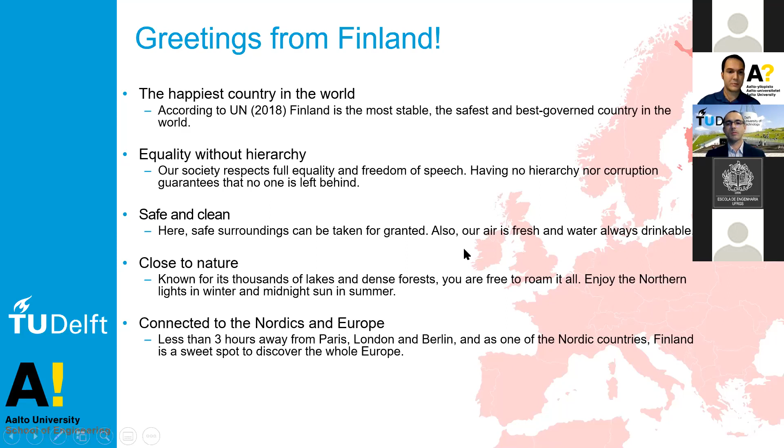Aalto University was founded in 2010, and although it has only 10 years of existence, there is already a strong background behind it, because Aalto University was founded after the merging of 3 other universities from the Helsinki area. But despite being only 10 years old, we are very proud to say that we are the 9th best young university in the world, and also the 50th most international university in the world.

Just some key figures about the School of Engineering. Aalto University has produced so far 3,300 students, with 400 Master of Science degrees, 300 bachelor degrees, and 45 Doctor of Science degrees. We currently have about 70 professors, and we are continuously looking for funding from non-academic partners.

That being said, given this introduction, let me now jump a little bit into some concepts about variable stiffness composites.

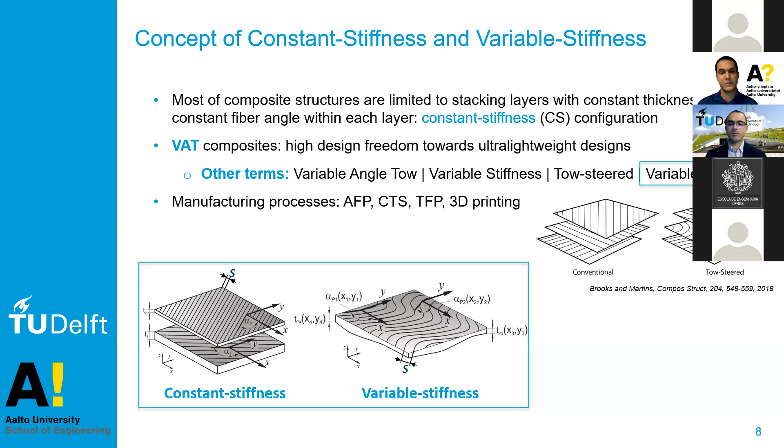Moving further on the manufacturing technologies to produce such laminates, let me say a little bit about the automated fiber placement manufacturing process. It's a well-established process, largely used in most aerospace and aeronautical companies, such as Airbus, Boeing, and also NASA, as we can see in the video being played now.

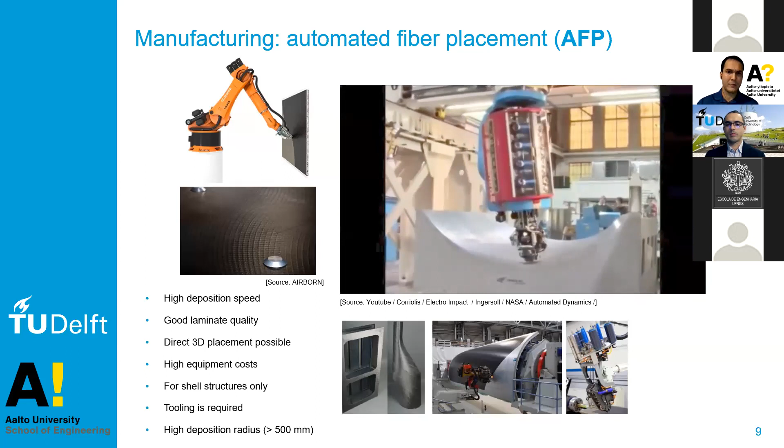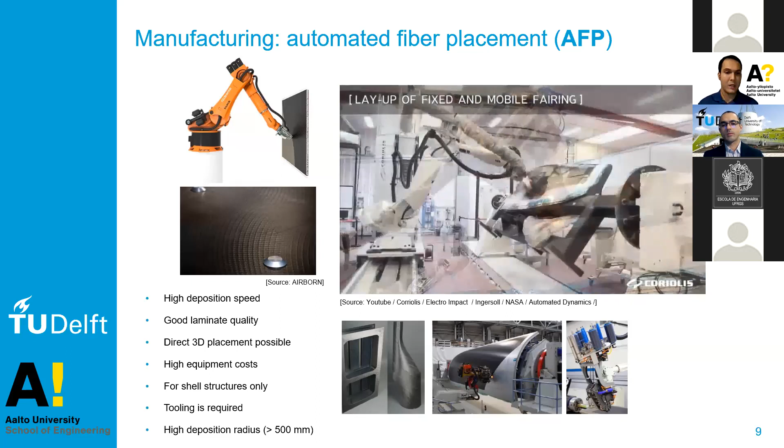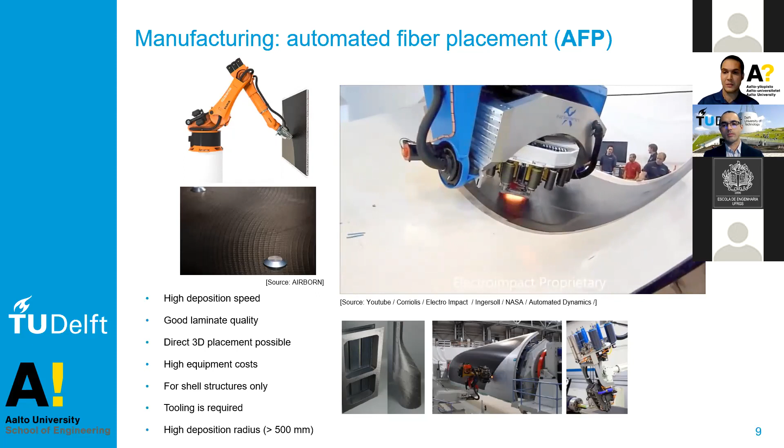However, AFP is, as people in the industry say, well suited for today but not for tomorrow, especially due to some key limitations, the most famous and critical being the high deposition radius, or minimum steering radius - it's the same thing. For example, to produce a nearly defect-free laminate, we have a minimum steering radius of 500 millimeters, which restricts the design freedom of a particular structure.

Here are some attempts that Saullo and I carried out at a startup company at Aalto University, in which we tried to steer fibers with AFP using several minimum steering radii. As we can see here, we could only achieve a defect-free tow path with a minimum steering radius of 700 millimeters, which is quite a lot for aeronautical and aerospace components, and it restricts the design freedom of the laminate considerably.

Based on those limitations, some researchers from the University of Bristol invented in 2012 the continuous tow shearing manufacturing process, in which the main motivation was to overcome the limitations from AFP in order to avoid fiber wrinkling, resin rich areas, and also discontinuities.

On the left-hand side, we can see the mechanisms to steer fibers with both AFP and CTS. With the same tow path, AFP would have either gaps or overlaps, but with CTS we can have a very smooth steering of the tow. At the center of the slide, we can also see the difference with the same tow path manufactured, or simulated, by AFP and CTS, and with CTS we get a pretty smooth tow path compared to AFP, and nearly defect-free.

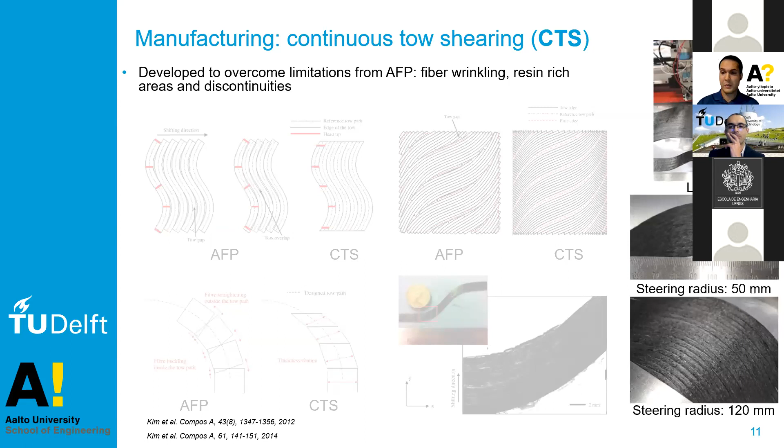Here we can see the potential to manufacture such structures, some small components, with CTS. Also, comparing the minimum steering radius on the right-hand side, with a minimum of 50 millimeters and 120 millimeters, we can get laminates with excellent quality and defect-free.

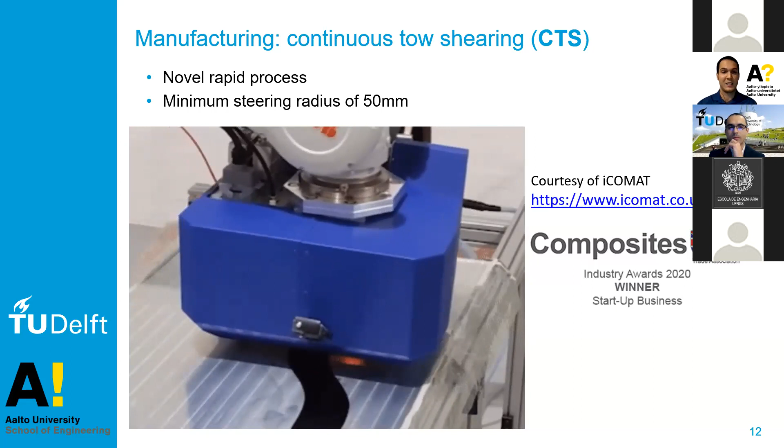That's just a video that we received yesterday from a company called ICOMAT, spun out from the University of Bristol, showing the beta version of continuous tow shearing, which they are now calling rapid tow shearing instead of continuous tow shearing, because it was pretty slow in the past and now it's extremely fast according to them. As we can see in this video, they can also manufacture laminates with a minimum steering radius of 50 millimeters and defect-free, which is excellent in terms of design freedom.

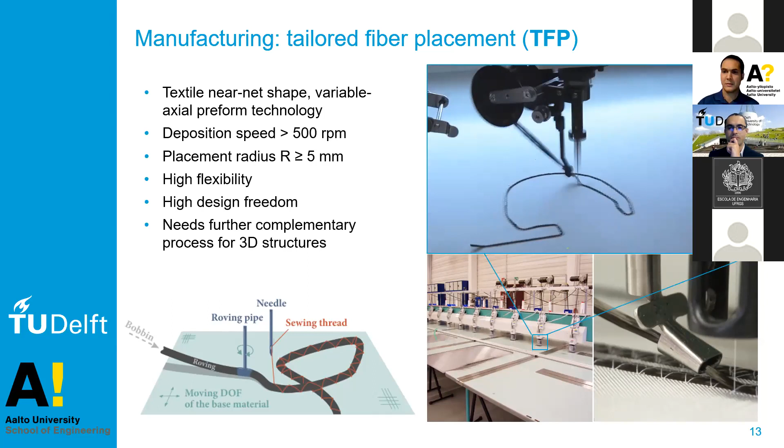The other manufacturing technique able to produce such composites is tailored fiber placement, as I mentioned previously, in which I have quite a lot of experience during my 3-year postdoc at Dresden. The best characteristic of this process is the very low steering radius, 5 millimeters, which is almost nothing. However, TFP has some limitations, especially because it only manufactures 2-dimensional laminates. So if you want to manufacture a 3D structure, you have to further infiltrate the resin through another process, for example through infusion, which restricts the spread of TFP.

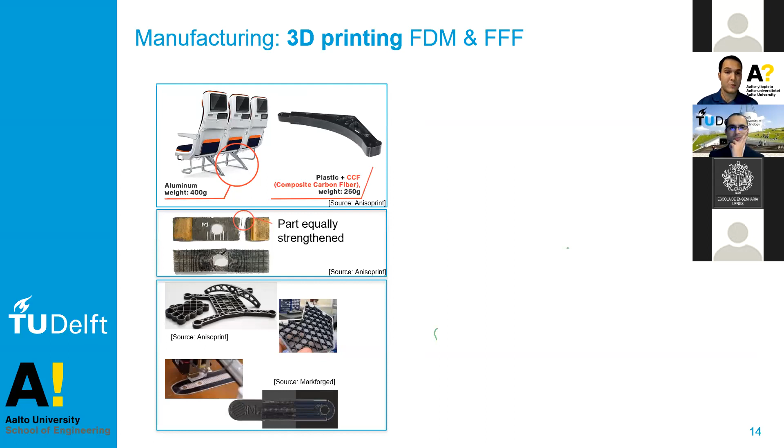Also, several attempts have been carried out to manufacture such composites via 3D printing. As we can see here, some figures and examples from Anisoprint and Markforged industries, in which they could manufacture a bracket located under a seat of an aircraft made of continuous carbon fiber filaments, some open hole specimens, and some lattice structures as well. Also, as we can see in this video, it's a bolted joint.

This is the base layer composed of a unidirectional layer, and then the variable stiffness layer is placed on top of it, and they alternate with a quasi-isotropic laminate in which a 0-degree layer is replaced with a variable stiffness one.

However, this technology is really far away from being mature. As we can see here, there are a lot of defects, and it's pretty tricky to manufacture such complex laminates using 3D printing.

At last, about the manufacturing processes, let me say a little bit about filament winding, in which there is absolutely nothing so far on variable stiffness laminates manufactured by this method. However, this is the most suitable process to produce pipelines and composite overwrap pressure vessels, especially due to its high productivity and high speed.

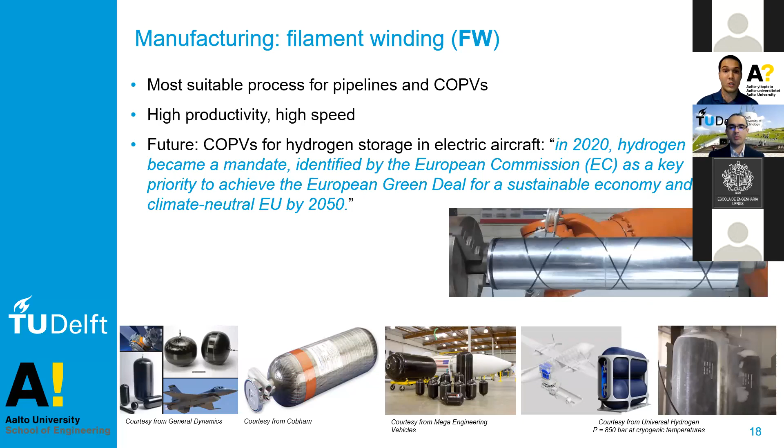We can see at the bottom of the slide a few examples from aeronautical and aerospace companies. I'll talk a little further in this presentation about whether this technology can or cannot be suitable to produce variable angle tow composites.

Thank you, Humberto. Now I'm going back to my presentation, explaining a bit more about the design of stiffened panels and unconventional structures. The main focus of my research is the design, analysis, and optimization of thin-walled structures, either metallic or composite structures.

The main challenges are always related to composite structures, and my goal now is to make it clear why it is challenging to design correctly and optimize composite structures, especially with variable angle stiffness.

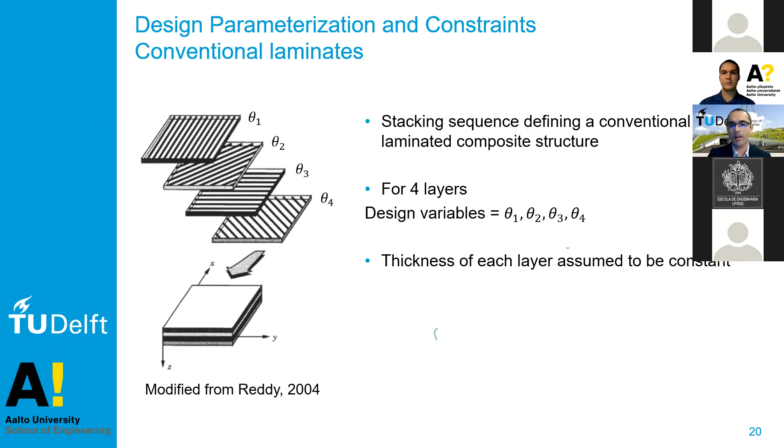Consider this very simple example that I modified from Reddy 2004. In this example, we have a conventional laminate with only four layers. Assuming a constant thickness, the definition of the layers is given by four angles: θ1, θ2, θ3, and θ4. So in this very simple design, we only have four design variables, assuming the thickness is constant.

When we consider the manufacturing constraints for a straight fiber laminate like this one, the first one that comes to mind, and a very important one, is the maximum number of subsequent layers with the same orientation angle, also called the contiguity rule.

To prevent delamination, if you have too many layers with the same orientation, the laminate becomes more prone to delamination during service. The damage tolerance, crack propagation, and life of the composite structure will be reduced because of this bad design.

So it is usual to avoid consecutive layers, and there's a rule of thumb to go up to 4 consecutive layers. Another common design constraint is the symmetry constraint, in the sense that if you want to keep the laminate decoupled in bend-extension behavior, so when you extend the laminate, you don't want it to bend, you must keep your laminate symmetric.

That's a very common limitation, especially for laminates that are autoclaved. Because if you have laminates that are autoclaved and non-symmetric, during the curing process there is a high tendency to bend and warp the structure.

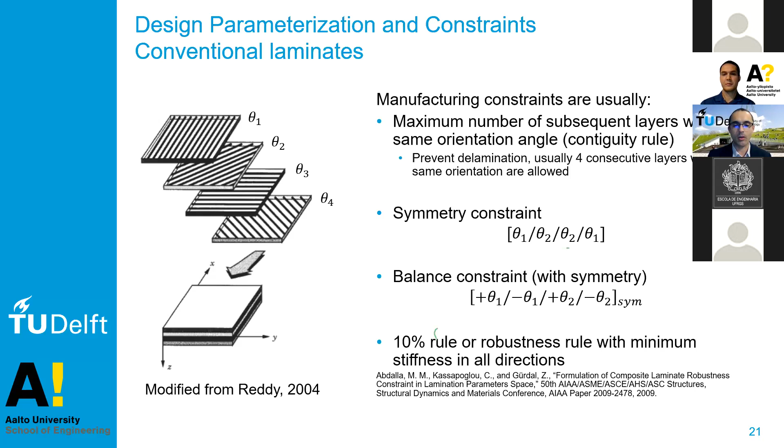There's another very common rule called the 10% rule or robustness rule, where we usually want a minimal stiffness in all directions. This was well discussed in the work of Abdalla, Kassapoglou, and Gurdal.

Before we go to a variable stiffness wingbox structure, I want to show the challenge for conventional wingbox structures using only straight fiber laminates.

This was an example I worked on quite a lot back in 2009 during my master's, where I had the challenge to design a composite wing, simultaneously sizing the laminates of the whole wing structure and positioning the ribs and their angles.

The design strategy back then was to subdivide the wing into different zones. In this example, I have 7 zones starting from the wing root to the wing tip.

To keep the manufacturing constraints easy to handle, we always assumed that a zone closer to the wing root would require more reinforcement than a zone closer to the tip. That makes sense if you consider the loading of a wing structure: we have higher bending moments when we move from the tip towards the root, and therefore we expect more reinforcements as we go to the root of the wing.

So the design strategy was that whenever we move to a zone closer to the root, we just add plies and never remove layers. The design variables are associated with the number of layers for each orientation, and we allowed the laminates to be non-balanced, so we had a different number of layers in minus 45 degrees and plus 45 degrees.

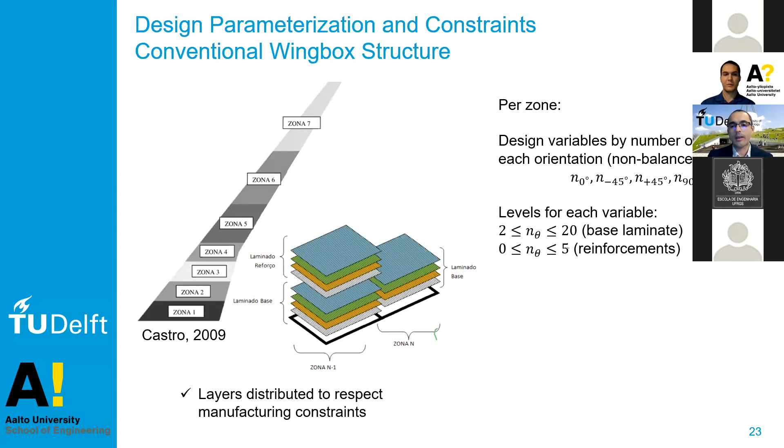By changing the level of each variable from 2 to 20 for the base laminate, the thicker one, and from 0 to 5 for the reinforcements, we already reached a design space of 6.7 times 10 to the power of 18 possible designs. Even with a method that evaluates each design in only 0.1 second, it would take 21.2 billion years to perform an exhaustive search. So that means you cannot do it — you cannot just evaluate every single design.

This tells you a very strong message that you need a robust optimization method. Looking at the size of the design space, the optimization method usually, in my experience, cannot be gradient-based only. Of course gradient-based methods are welcome to find local minima, but you need something else to perform a robust exploration of the design space.

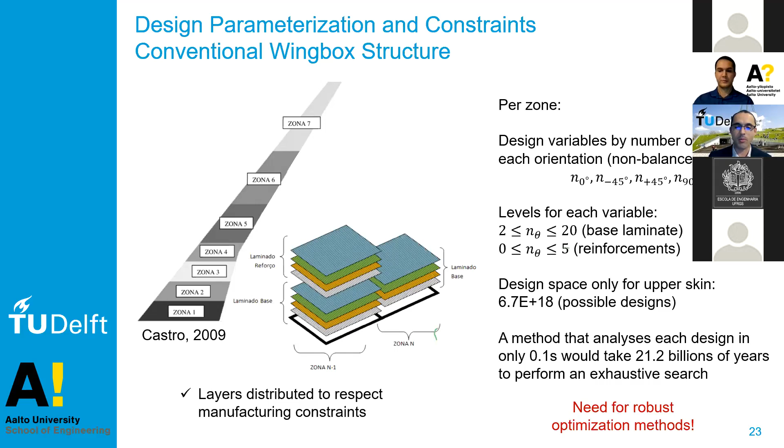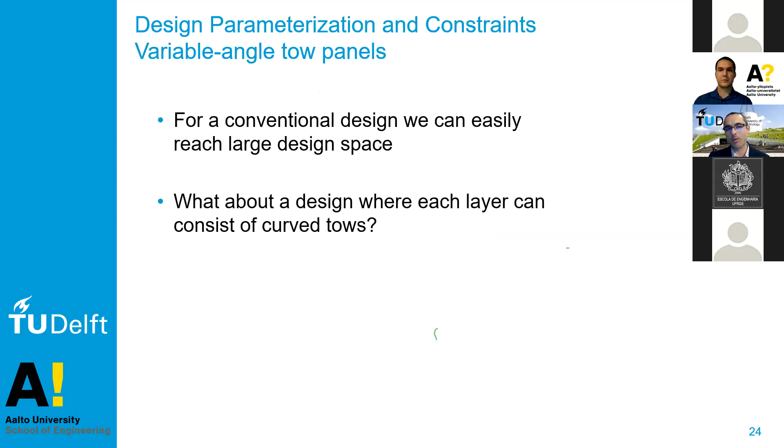For conventional design, we can easily reach this large design space, as I just demonstrated. Now, in my previous example, each layer was a constant layer with a constant angle. Can you imagine now a design with curved tows, like this one?

This was recently submitted to the AIAA SciTech conference, and this is the result of an optimization with curved fibers. Looking at one of these curved layers, we can see how the tows, or the fibers, are varied throughout the plate.

In this case we have a linear interpolation of the angles along the width direction of the plate. We start with 65 degrees, in the middle of the plate we have 10 degrees, and at the end we again have 65 degrees. So it means we have 2 angle variables per layer.

Another feature of this design is that it was designed to fit continuous tow shearing processes. One feature here is that you cannot decouple the thickness from the steering angle, and that makes the design space and the analysis methods much more difficult.

The number of layers is usually unknown prior to the design. Then comes the challenge: even if you have a very good optimizer, how can you parameterize your design so it becomes robust enough that your optimizer can find an optimum that is a good optimum? It's always extremely hard to assume you've found the global optimum, so I would just say a good optimum. The parameterization must be good enough that you find a good optimum.

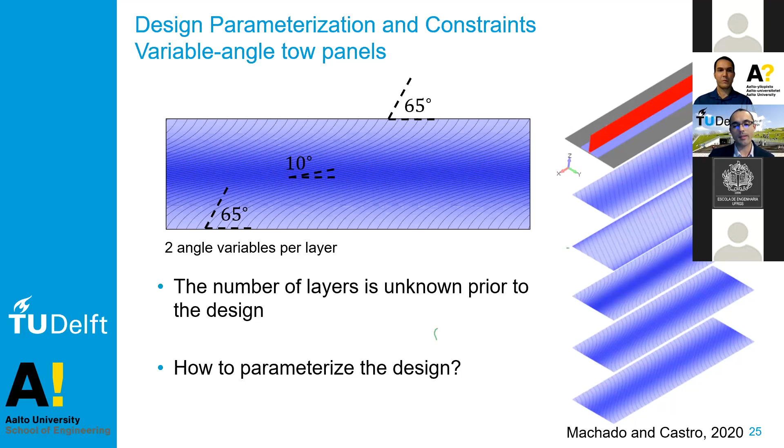But if your parameterization is too open, you'll also end up creating a design space that is extremely large and extremely hard to explore. So parameterization — the design concept and how you parameterize your design — is a very key aspect for a successful structural design.

Moving back to 2018, how did we start doing parameterizations with the master students at ITA? This was work with Capacia, Hernandes, and myself. We subdivided or mapped the wing box, in this case the upper skin of the wing box, using control points. That's a way to reduce the number of design variables. Instead of having one design variable per finite element or per region, we have a set of control points—in this case 9 control points.

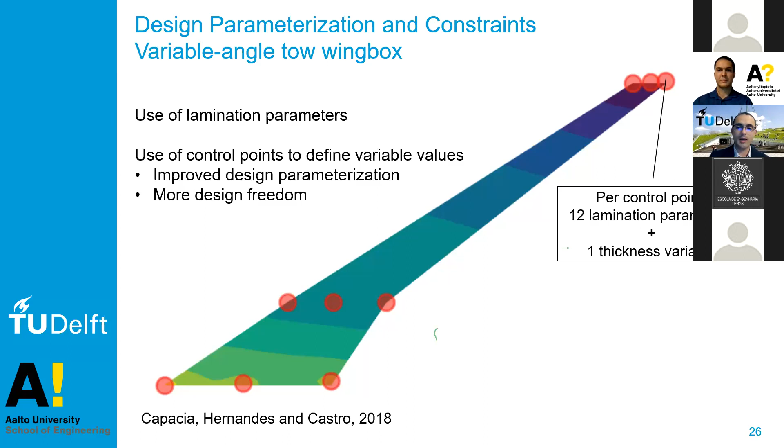We control the design variables at these control points, and everywhere else the properties of the structure are interpolated. From our experience, we had an improved design parameterization compared to the previous one, allowing more design freedom because we were not fixing the transition zones from one laminate to the other—those regions were found during optimization. We had about 13 variables per control point.

So we had this experience of a reduced design space. The optimizer could find a good optimum very rapidly using, in this case, gradient-based methods. It led to a more convex optimization using lamination parameters, but it only supports this concept when the thickness is completely decoupled from the lamination parameters. It only works well when you have a manufacturing process that decouples thickness from fiber steering.

As we discussed before, as Humberto showed, the tow steering processes are the ones that can deliver a high manufacturing rate with a very small minimal radius. With those new processes, we cannot decouple the thickness from the fiber steering. So we need a better parameterization and a better optimizer than the one I'm showing now.

Retrieving the laminates when we work with lamination parameters becomes quite a hurdle, especially with this coupling with thickness. On top of retrieving the laminates for many regions, you must also do the blending between the different regions. In my group, there is a person, Julien van Campen, who is a very good specialist on blending of different regions. If you want to know more, look for his work, and if you have trouble finding him, just send me an email.

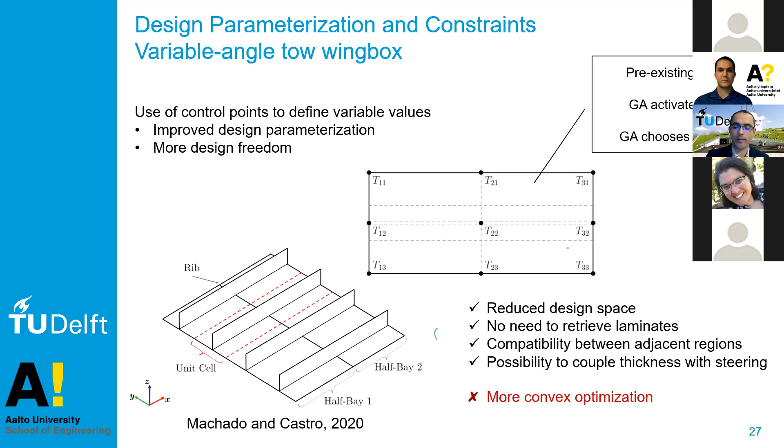What is this minimal steering radius that Humberto mentioned for AFP? That is a big limitation of AFP. For CTS, or continuous tow shearing, we go down to only 50 millimeters, and for tailored fiber placement, they go down to only 5 millimeters. But what is this steering radius?

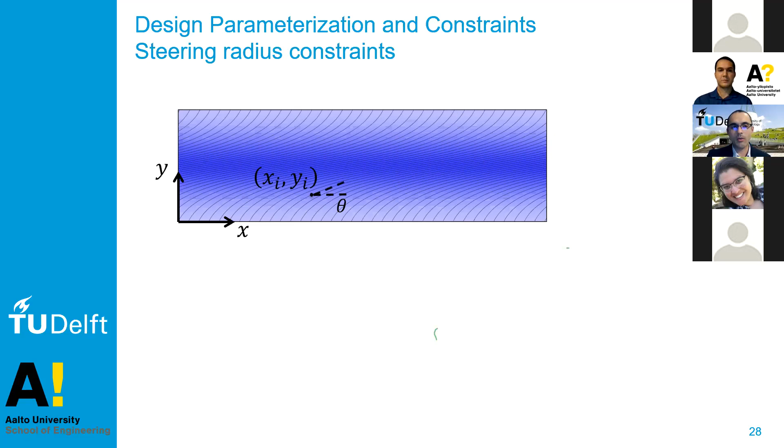Consider this plate with curved tows. If we take any coordinates on this plate, X and Y, and measure the local fiber angle at that point, we can use calculus to calculate the local radius of curvature. To remind you, for AFP we are talking about a minimum range of 500 to 800, and to go to 500 you need an extremely well-controlled process—it's very difficult to do that. For CTS, they can easily go down to 50, and TFP to 5.

In your optimization, you have to guarantee that the designs produced respect these manufacturing constraints on tow steering. So how to do that? One of the approaches we propose this year—there are many others I'm going to discuss—is to measure this tow steering radius, or curvature radius, at the control points.

So in this case, I have 9 control points on this segment of my stiffened panel. If we look at this control point at T, what we call T13, we can calculate the local radius of curvature, and I'm calling this rho 13. If we go to the midpoint here, T22, we can also calculate the radius there, and so forth. If you do this for all the control points, we can guarantee that the interpolated radius of curvatures will be within the interpolated range. How do we calculate the radius? We use this formula from calculus, where the variable we need is dy/dx. And if you remember, dy/dx is the tangent of this local steering angle.

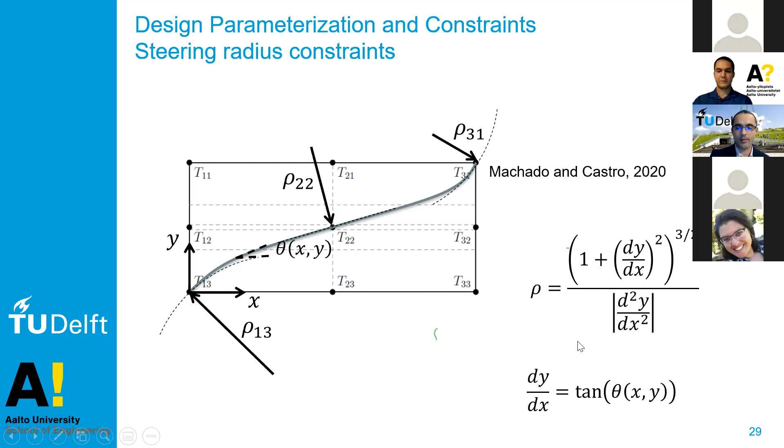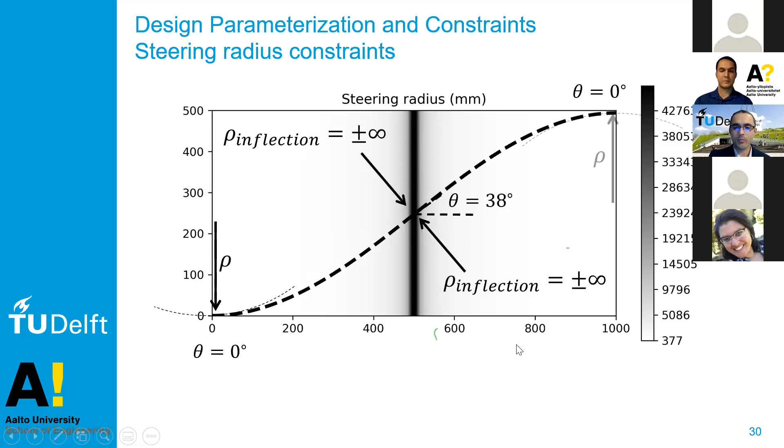Now, how does the steering radius look like? If you take a tow that goes from 0 to 38 and then back to 0, the steering radius is plotted here in the background. You can see that at control point 0,0, and here at 1000,500, at these coordinates, we have a minimal radius of 377. At the inflection point, the radius goes to infinity because the line becomes flat. If we consider the steering radius, the minimum one achieved for this plate, we can conclude that this plate could only be manufactured using CTS or TFP. If we wanted to manufacture a design using AFP, we would have to constrain this radius to a higher level than we have now. Just to give you an example of how these manufacturing constraints play a role in the design.

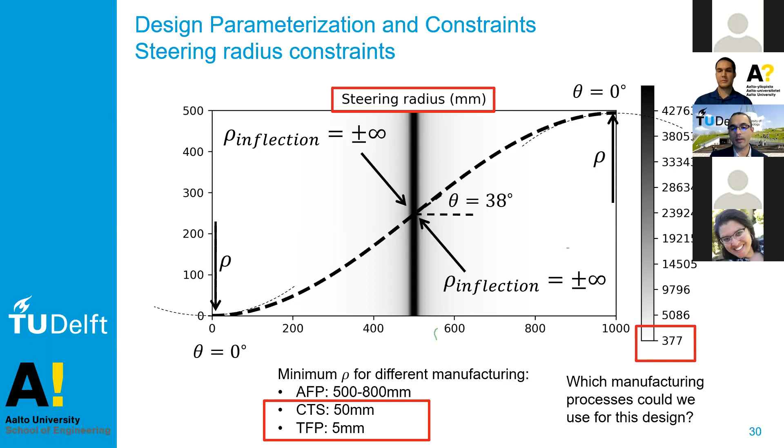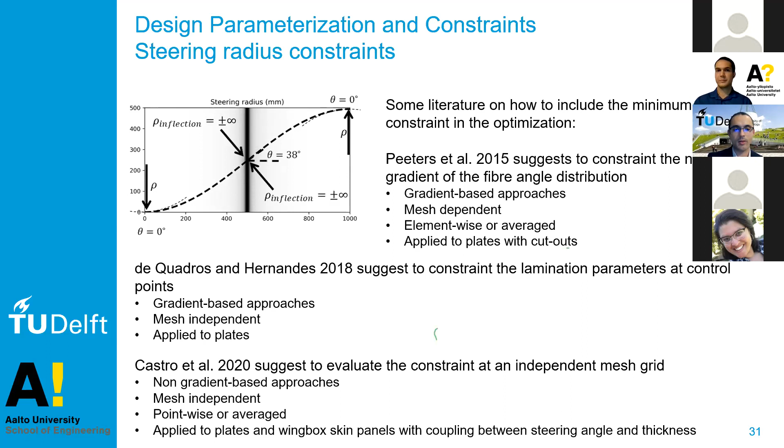Now to talk a bit more about the design of variable angle filament-wound cylinders. There's a key feature here, because there was an idea coming from the Federal University of Rio Grande do Sul, from the group of Professor Sandro Amico, led by Humberto at that time, right Humberto? They had the idea to manufacture variable angle tow, or variable angle filament-wound cylinders. The original idea was to parameterize the design by subdividing the cylinder along the axial direction using constant angles.

And this year, together with Jihua Wang leading the work and doing all the meta-modeling, we proposed more continuous designs, or continuous parameterizations. They proved at the end to give the best buckling performance—we're talking about a 20% improvement in the buckling load because of this higher continuity and the larger design freedom. If you want to know more, this work has already been published. You can easily find it if you look for our name on Google Scholar, for example.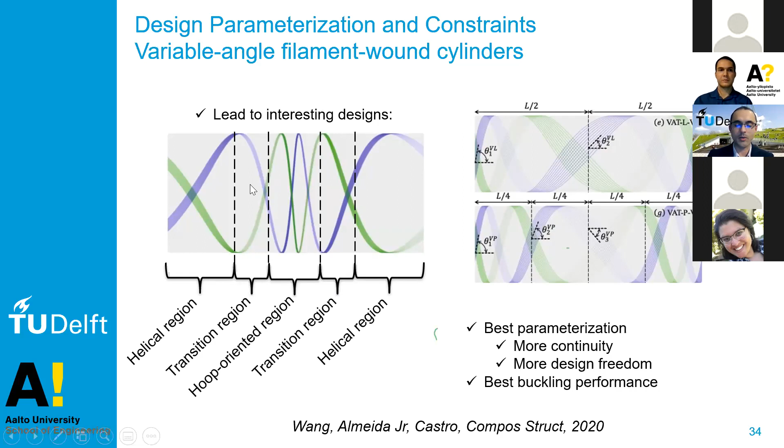So it's a very interesting design that we ended up with. One of them is shown here. These two tow paths represent the filament wound around the cylinder. What we can see is that closer to the edges, we had helical regions, so the plies are more helically oriented. There's a transition region, and in the middle we have hoop-oriented plies, which also translates to higher thickness in the middle to improve the buckling behavior. If you want to know more, please go there and check the publication.

Now, going a bit into another very important aspect when we are performing a design—it's not only the parameterization of the design and the implementation of the design constraints, but also the analysis methods.

The analysis methods are the ones that will tell if your design is respecting the defined constraints or not. For example, you might have stress constraints, maximum displacement constraints, buckling constraints, vibration and natural frequency constraints, and so forth. The analysis methods are the tools that will tell you if the design is good or not, given your constraints.

I'm going to briefly talk about analytical methods, semi-analytical methods, and finite element methods. I'm not going into formulations here, it's more to give you an overview.

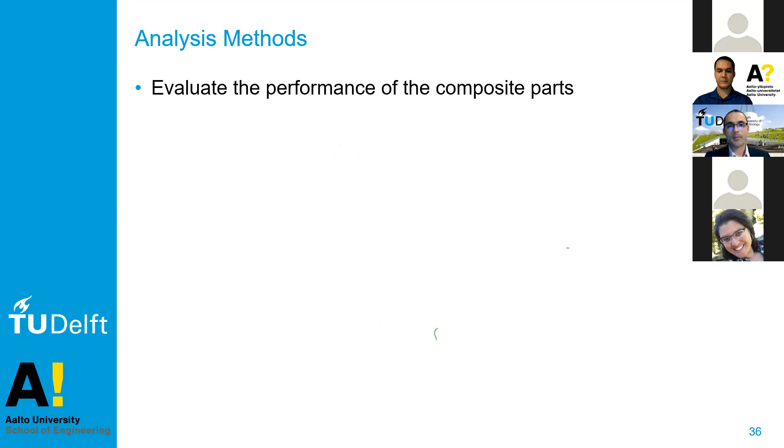So a bit more about analysis methods. The idea is to evaluate the performance of your composite parts using inputs for analysis methods. We are talking about the geometry, the loads that are going to act on your product, and the boundary conditions. These boundary conditions can include what are the adjacent structures of the structure being designed, whether this structure becomes in contact with another structure, and what are the elastic supports for this structure, and so forth.

The laminate definitions, usually we're talking about the layers, the orientations, which can be constant or variable. These are all inputs for your analysis methods. And the outputs, we are usually talking about first strains and stresses, and from here we can derive failure criteria.

Just to give you one example of a failure criteria that is largely used is the Hashin criterion from 1980. The Hashin criterion for laminated composite structures provides you with four failure modes: fiber tension, fiber compression, matrix tension, and matrix compression. As you know, for fiber reinforced plastics or polymers, the failure can be either in the fiber, in the matrix, or in the interface. I think there is a modified version of the Hashin criterion that also provides you a failure mode at the interface.

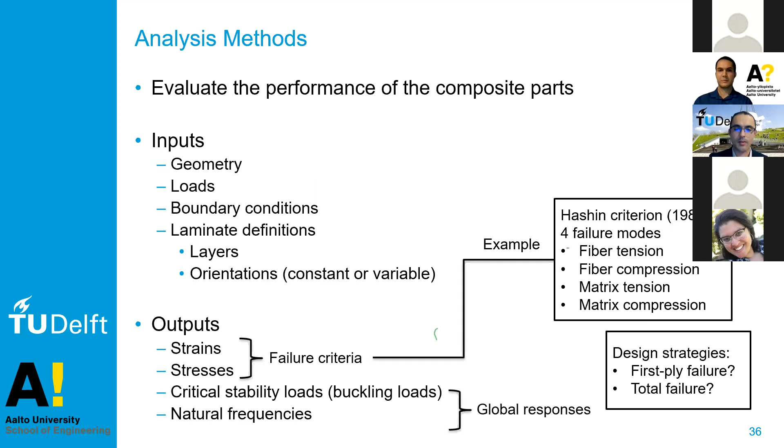It can be the buckling load of a whole panel, or even of a whole spar of a wing, or let's say a fuselage panel, etc. The natural frequencies, we can talk about the natural frequency of just a single panel, or the natural frequency of a whole wing, or even of a whole aircraft, going more towards aircraft applications. These are again considered to be global responses.

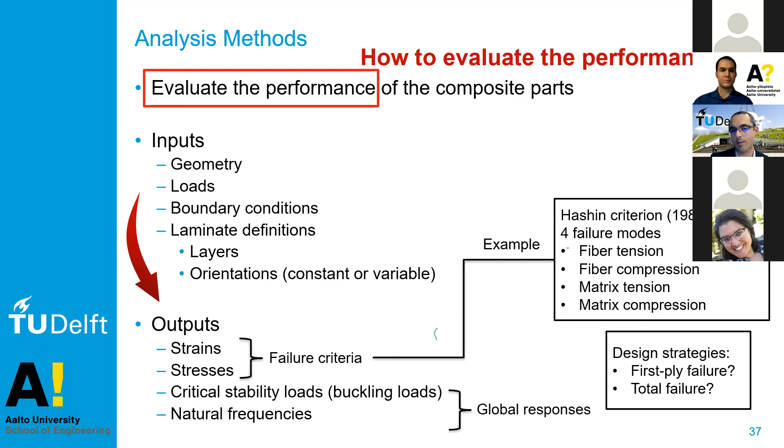This evaluation of the performance is where the question comes very strong: how to evaluate the performance? There are many different ways, and again usually they can be classified as analytical, semi-analytical, and finite elements. So let's understand their differences and the main features.

In a design and optimization process, we are always given the inputs, we evaluate the outputs, and then our optimizer can change the inputs again to reevaluate the outputs. The analysis methods are this box in the middle, providing you with the translation from inputs to outputs.

In analytical methods, I always say it should be your first option. They are the fastest methods, the easiest to implement usually, but they have some limitations. Let's discuss them. Usually they are only defined or derived for continuous geometry, so there's rarely a method that works for structures with cutouts, especially if we're talking about buckling of structures with cutouts. It is quite hard to find a method that is robust enough that you can rely on for your full design.

If you also have abrupt changes, such as local reinforcements, the analytical methods tend not to work. They are ideal usually for simple geometries like square plates, rectangular plates, circular plates, shapes of revolution like cylinders or cones, things that can be easily mapped into a mathematical equation. For them, usually you can also derive an analytical method. A very important feature of them is also that they are usually derived for constant stiffness.

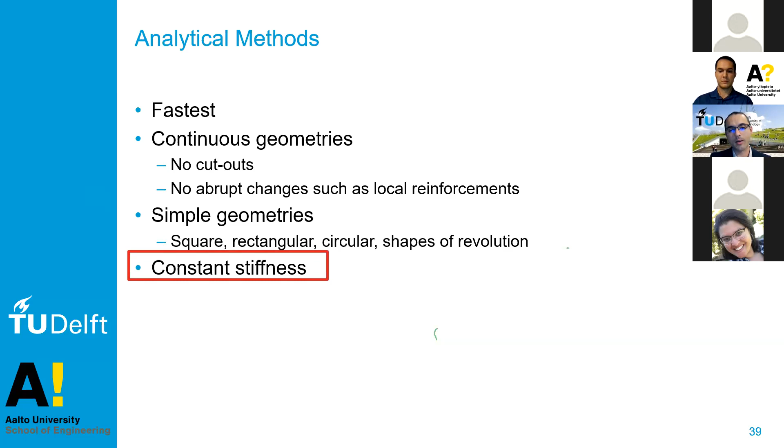If there is variable stiffness, which is the topic of today's seminar, the analytical methods tend not to work. So at least you have to go for something more powerful. Let's say the next step of more powerful and robust methods is what I'm calling here semi-analytical methods. Why are they semi-analytical? Let's try to make this clear now.

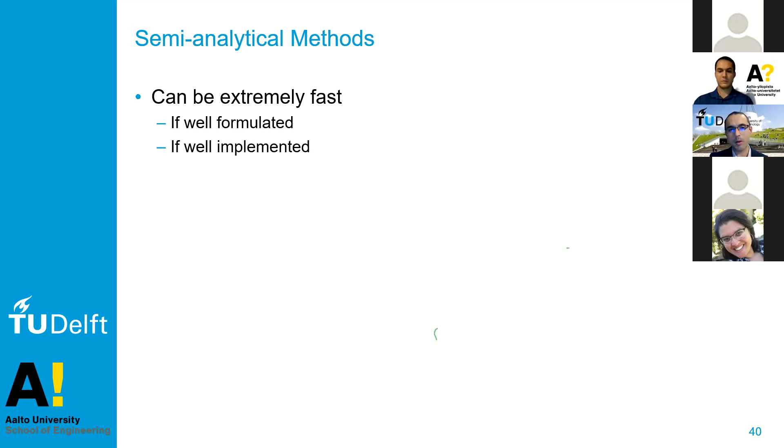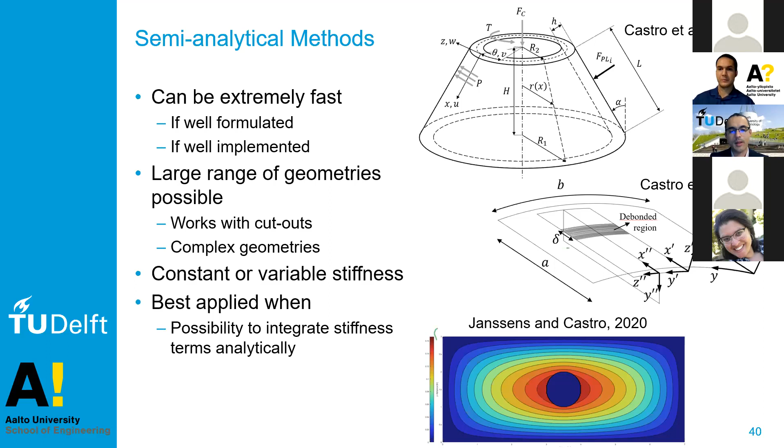They can be extremely fast, not as fast as an analytical method, but they can be as fast or comparably fast if they are well formulated and well implemented. And the well implemented part is also extremely key. They work for a large range of geometries with cutouts, complex geometries that can come from an assembly of simpler geometries. And they work with constant or variable stiffness, and are best applied when you can integrate the stiffness terms analytically. I'm not going into detail now. If you want to know more, please contact me.

The nice thing about the semi-analytical methods, why are they faster, why are they better than the finite element, which I'm going to discuss next, is that they provide a better approximation than a piecewise linear or piecewise polynomial approximation. Usually we use approximations that are close to the exact solution, but we know there might not be an exact solution, so we look for functions that tend to represent exactly the phenomena. Another feature that makes them faster and converging with reduced computational cost is that we include some of the physics kinematics into the stiffness calculation.

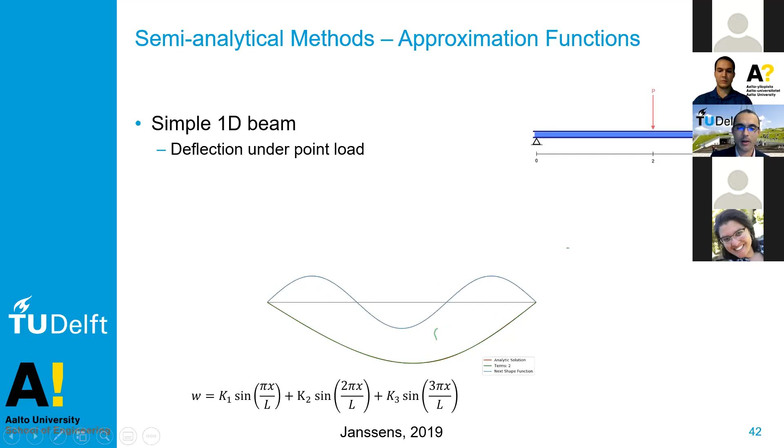We can get an approximation that is slightly better. With the second term, I can get an approximation that is slightly better, and this is represented by this animation here. Now, if we keep including terms, I will eventually reach the same solution given by the analytical solution. So that's what I mean by using a nicer, better approximation function than the ones usually found in finite elements.

Now let's go to the next feature. In a general purpose finite element, if I wanted to simulate this conical shell, the strain equations are usually the ones given here, so I don't have any information about the cone geometry embedded into the strain equations. On the other hand, when we build a semi-analytical model, for the strain calculation we already include information about the local radius distribution, and in this case also the semi-vertex angle of the conical structure. Since we are providing more information about the physics into the kinematic equations, once we calculate the stiffness matrix, we are not calculating a general purpose stiffness, we are calculating the stiffness of a cone. That's why they usually converge faster.

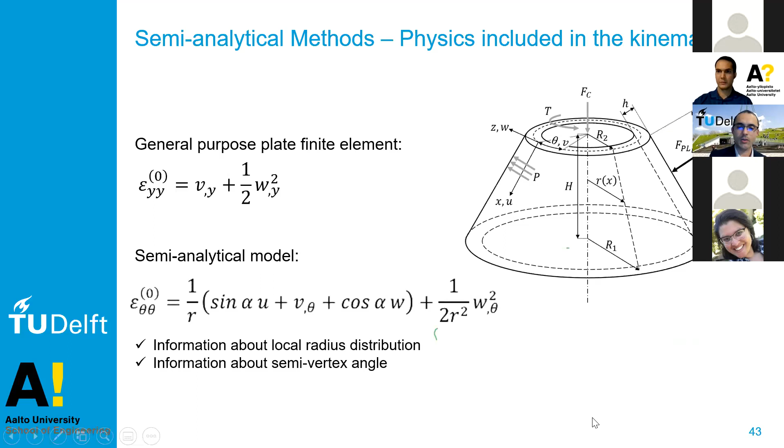And in finite elements, it is usually not always the slowest among the three solutions I'm comparing. They work for any geometry, so the advantage, and I largely use finite elements as well, is that they work for any geometry. There are very good commercial software available, and also many free libraries available that you can play with. They work for any stiffness distribution.

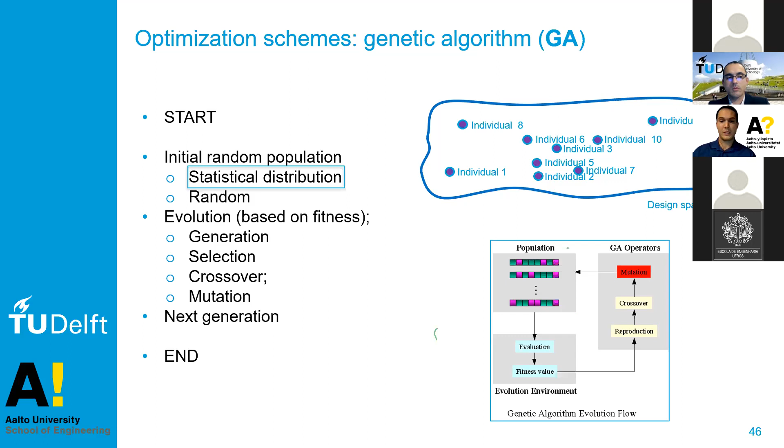After that, they are distributed and evolve based on a fitness function, which is the same as an objective function, just a term associated with genetic algorithms, but they do pretty much the same thing. Then we have the generations, the selection of new individuals for the next generation, also based on fitness, the crossover and the mutation between genes. Then we have the next generation, and so forth.

As we can see here from the stochastic process, after the initial evaluation of the randomly generated population, they are evaluated by the fitness function, and then we have the second generation on the bottom right-hand side of the slide. We have a different population which is already supposed to be better than the initial population, and it usually is. Otherwise, you would have to parameterize your optimization process again.

Then we have generation 3, also supposed to perform better than the previous generation, and so forth, until we reach the final generation N, where we have, at the center of the figure, a convergent design space or a convergent optimum for your optimization scheme.

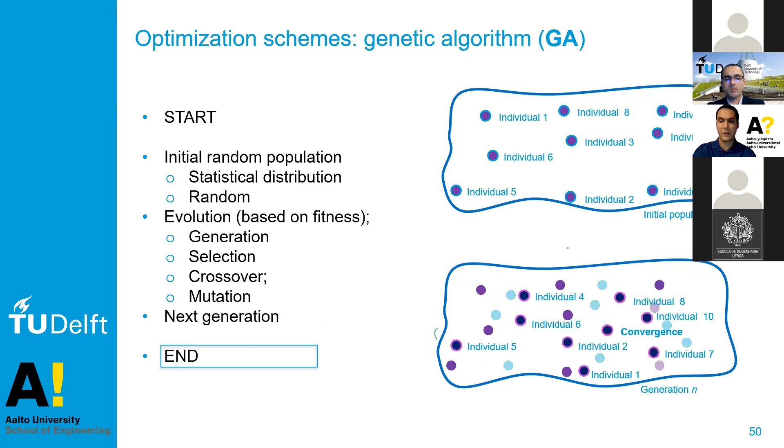That being said, let me talk about another optimization scheme, the so-called Kriging meta model. It's not actually an optimization method, but instead a meta model, which is an approximation of the input and output of a function. They are fitted to approximate the input to the output by training the meta model.

A meta model is also known as a model of the model, because when you have a model and take some samples, you then train the samples based on the output that you have. That's why it's also referred to as the model of the model.

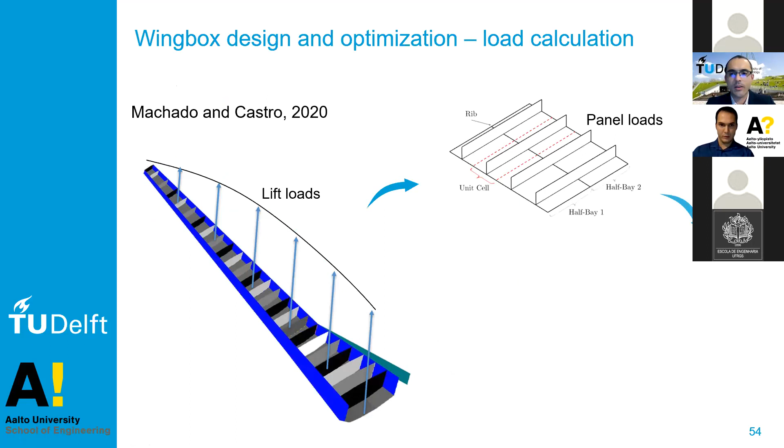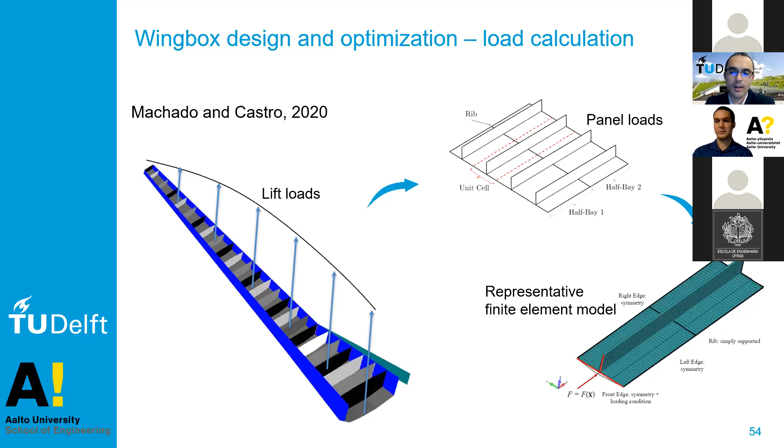Basically, the first step consisted of translating the lift loads of the wing to panel loads, and then translating the panel loads or panel representation to a representative finite element model. We are using Nastran here for the analysis.

Then we parameterized the design using the control points, and since we wanted only steering along one direction, in this case the Y direction or the vertical direction, so all these constraints already come into play.

And if we want continuity within one bay, that means the angles for this panel should be equal to the angle of the next panel or adjacent segment of the panel. Then we also have this new constraint for those control points.

At the end, we have only two independent steering variables per layer for this parameterization. These are called T11 and T12.

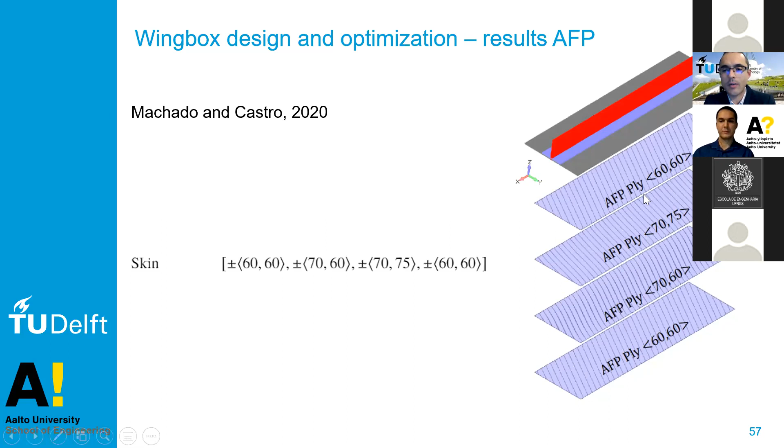So we have here 8 layers given by plus or minus — I'm just showing plus or minus, not the counter angle, so not the balancing pair. And you can see a representation of these angles, how they would look in the stacking sequence.

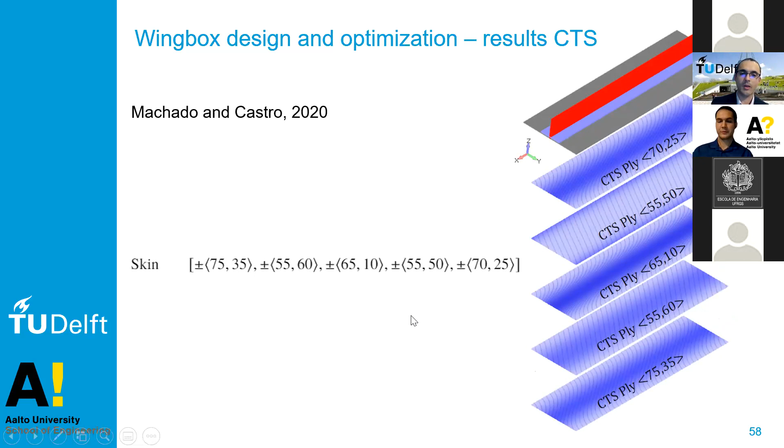So now what would be the next step? This is a work in progress. From the curved towpath, we generate CAD splines, and these are the same splines that were required to perform the AFP test that Humberto showed earlier. Then those splines go directly into the robot program that will perform the steering.

Now let's quickly go to the second case, Humberto.

Yes, I will speak now about another example of optimization using a genetic algorithm. I guess most of you are continuously following this series of webinars, and the first one was given by Dr. Axel Spickenheuer, who was my supervisor during my postdoc in Dresden.

He probably mentioned a brake booster structure, which is a boosting system of a bicycle — basically the structure that sustains the brakes of a bicycle.

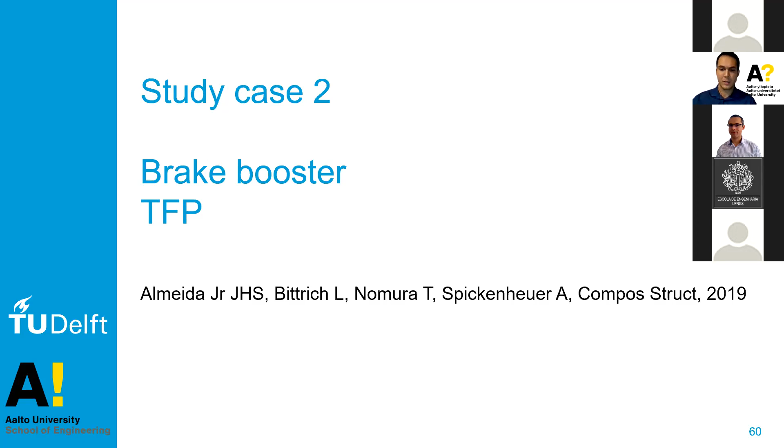I'm extending a little bit further, covering a part of the research not mentioned by him, in which, as we know, he showed the topology optimization of those structures, where the initial design was a quasi-isotropic stacking sequence. You saw previously in this presentation how a quasi-isotropic stacking sequence looks like — composed by straight fibers oriented at 0, plus minus 45, and 90 degrees.

And then it was topologically optimized. Now we optimized it using a genetic algorithm in order to find the best number of truss sections located at each section of this brake booster, as we can see here.

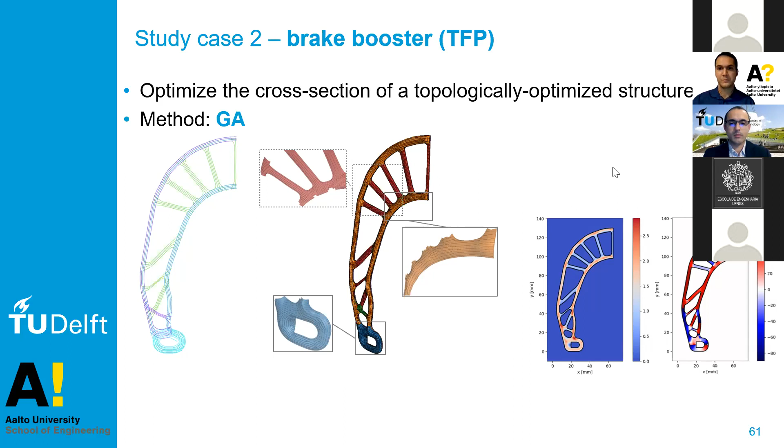This is a scheme carried out to parameterize the boosting system, in which it was discretized by the number of trusses per section. The initial population has a random number of trusses per section, as shown at the center of the slide. Each chromosome is composed of 5 genes, where a gene is basically a truss per section, and the optimization has 12 chromosomes and 60 genes. This means each section can have a maximum number of 5 trusses, so with 12 sections we have 60 genes. The maximum number of 5 is not random, but defined by the maximum thickness in order to respect the design space provided by the topology optimization previously performed.

I will now talk about another example, not using a genetic algorithm, but instead an optimization scheme invented by our group, a previous group at IPF, in which we optimized the open hole tensile specimen manufactured by tailored fiber placement, one of the manufacturing techniques I mentioned at the beginning.

The initial guess was a laminate, a plate or specimen subjected to longitudinal tensile loading, reinforced with rectilinear fibers oriented along the loading direction, indicated here by the purple arrows. I should also mention a base material of ±45 degrees, a woven fabric, was included and placed under the layer to be optimized, highlighted here with black lines representing the fibers. The main purpose of this ±45 layer was to prevent premature delamination during longitudinal tensile loading, which is well known to happen before failure.

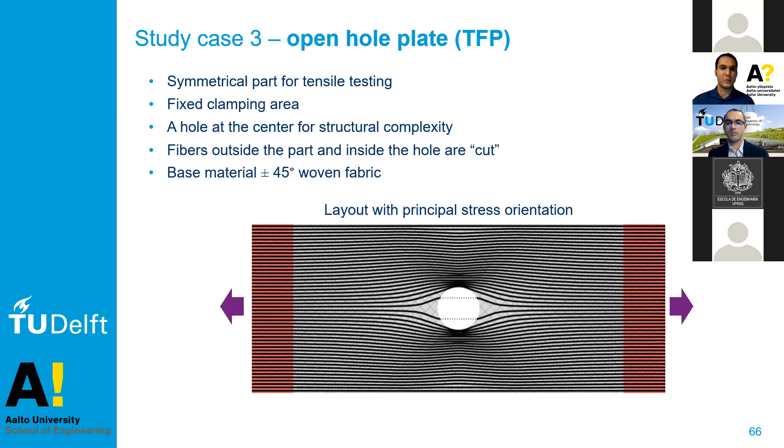Before optimizing with our approach, we simply placed the fibers along the principal stress directions. We can see here that we no longer have only straight fibers in the design space, but instead some curved fibers, especially around the hole.

The optimization scheme developed is called DFPO, referred to as direct fiber path optimization. The fiber layout is shown here on the top left-hand side, with fibers surrounding the hole very explicitly, so the design is quite different than the principal stress orientation.

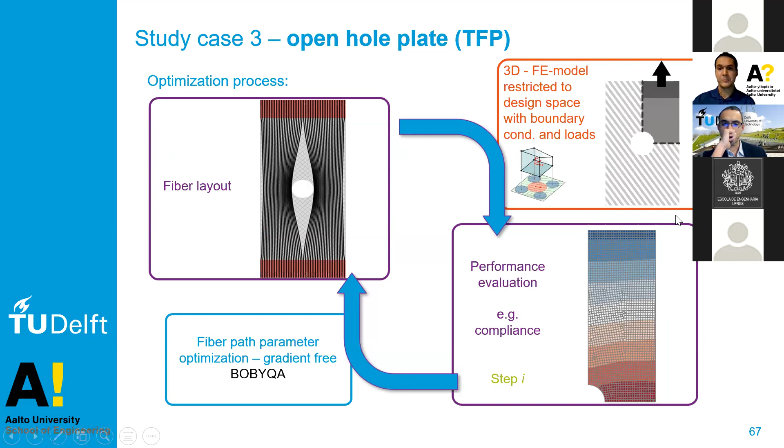After the optimization, we also manufactured it. As I mentioned at the beginning, with tailored fiber placement we need further processing to make a laminate, because it's a dry manufacturing technology. So after manufacturing the preform, shown here on the top left-hand side, we manufacture the laminate by infiltrating resin, in this case using vacuum-assisted resin transfer molding, placing the fibers in the mold and infiltrating the resin assisted by vacuum.

On the top right-hand side, we can see some physical characteristics of the laminates. The fiber volume fraction is pretty similar, so the properties we get are comparable and well weighted. Here on the bottom left-hand side, we see the quality of the manufactured laminates, which is excellent, for the four specimens: the unnotched, the notched with straight fibers, the notched with principal stress orientation, and the optimized sample.

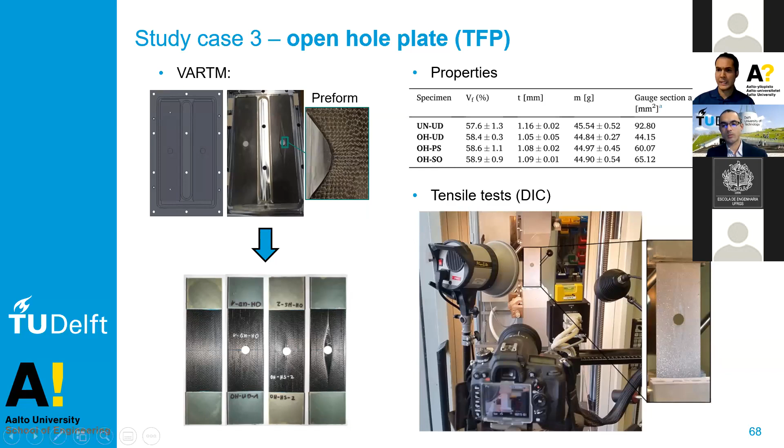Later on we carried out the tensile tests, assisted by digital image correlation in order to measure both strain and displacement fields of the specimen during the loading history. Here on the bottom right-hand side, we can see a video of the tensile testing happening.

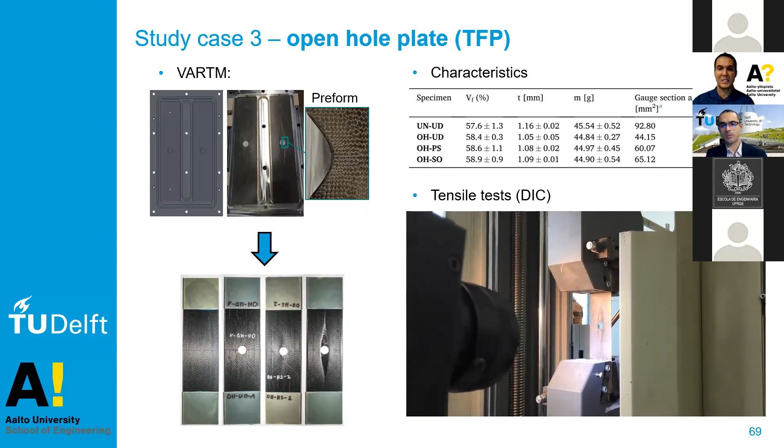On the back of the slide, you can see Axel there, very curious, and he was carried over after the specimen was broken. So yeah.

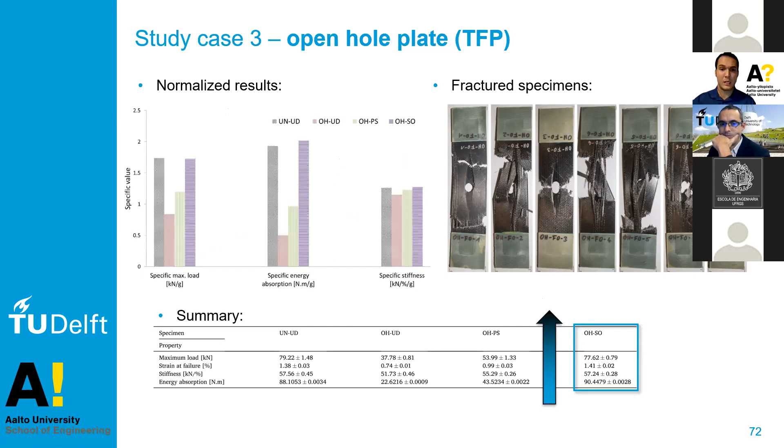Just summarizing the results, we've got improvements in terms of all properties analyzed: the ultimate load, the specific energy absorption, and specific stiffness, and also in terms of strain.

Regarding the results from digital image correlation, this is also a result that I like a lot, and that relates to the stress concentrations around the holes, which is one of the key concerns when designing a component with fiber reinforced composites with discontinuities.

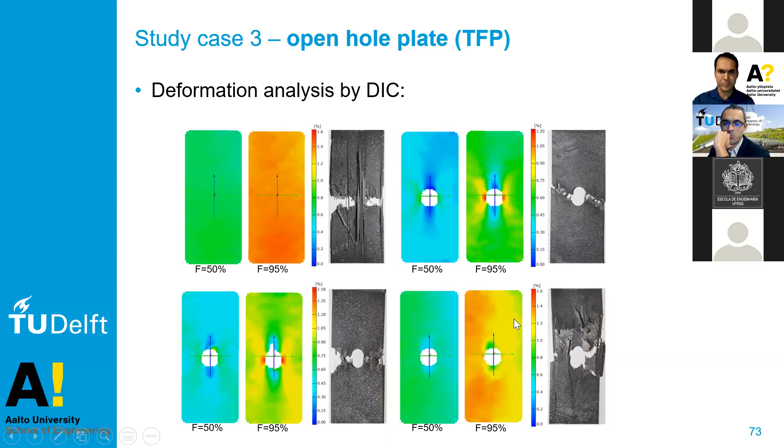Having a look on the top right hand side and on the bottom left hand side, we see some stress concentrations around the holes. However, if we look at the bottom right hand side for the fully optimized specimen, we can see that there are no red areas around the hole. So basically we can infer that there are no stress concentrations and that they were alleviated with the layout provided by the optimization scheme.

And I'll pass the word to Saullo to speak a bit about another example.

Thank you, Humberto. I'm going to go quickly through this as well. This is a recent study where Jihua Wang was the first author. I think he's one of the attendees in today's seminar, so thank you, Jihua, for the nice work.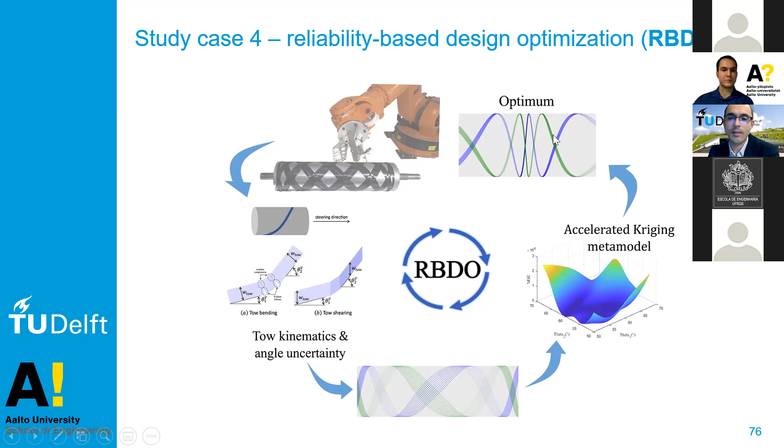As I previously showed, this is a typical design that we obtain. Again, I'll briefly go through this. We used different parameterizations in the design, and the best ones were those based on continuous interpolation and control points.

As we go quickly through this because of time, just a bit more about the accelerated Kriging model. The idea is that the default Kriging model has an error estimator, and based on the error estimator of the whole interval of all design variables, it proposes the next training point such that the mean square error of the whole approximation reaches the tolerance level you want. This is done continuously during the training of your Kriging model.

What Zhihua proposed is to have not only the new training point based on the full error estimator, but instead a training window, or a focused window, or moving search window, as we call it, such that the search for the next training point can also be done within this searching window. The searching window moves because it changes each iteration according to the optimum position found in the Kriging optimization. In that way, we reached much faster convergence, which enables the usage of this Kriging meta modeling for much more complicated optimization problems involving many more variables.

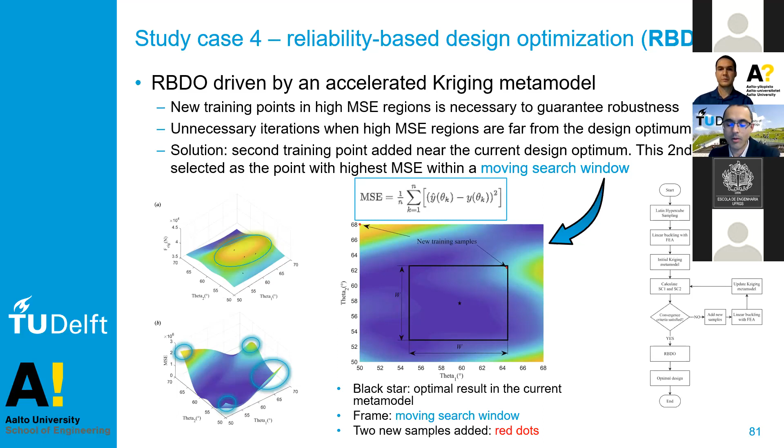The best ones were those where we used continuous interpolation by means of control points in the design. The largest buckling improvement from the baseline was 20%, which is quite significant for these cylinders with only 4 layers. So we can extrapolate for more layers and get an even better buckling improvement.

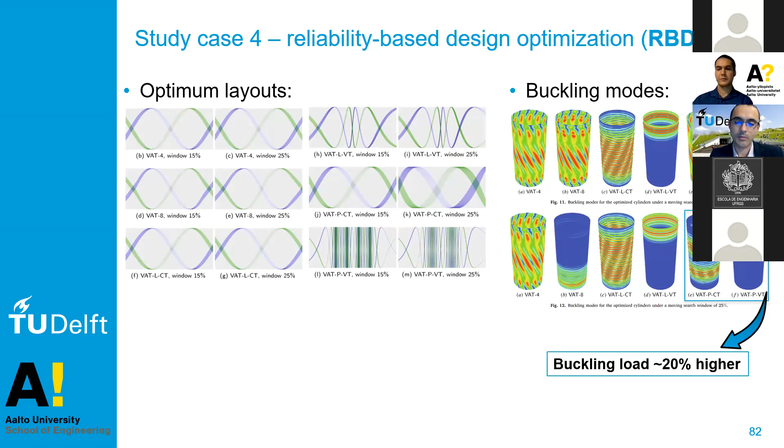I'll quickly go through this because of time constraints, and now Humberto will finalize with the last study case. Thank you, Saullo.

This very last study case is pretty similar to the previous one mentioned by Saullo, which is the variable angle filament-wound cylinders. But in this case we move a bit further from design, modeling, and optimization. We also gave the very first trial in the literature to manufacture such variable angle tow structures by filament winding.

This figure summarizes what we did, carried out in collaboration with Professor Sandro and Saullo. We initially designed and optimized the cylinders according to the designs mentioned by Saullo. However, in this work not all those designs were considered; instead we only partitioned the cylinder into 2, 4, and 8 frames. The example shown here is with 8 frames, in which we have symmetry with the center of the cylinder.

So although the cylinder is partitioned into 8 frames, we have 4 design variables instead of 8 in order to provide some symmetry. After the optimization, carried out with a genetic algorithm, another example was for the first time manufactured by filament winding.

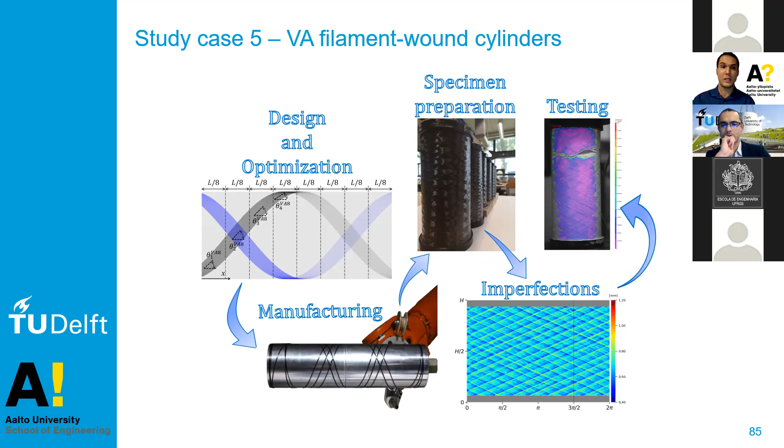We also prepared the specimen quite carefully by adding a resin potting on the edges of the specimens in order to alleviate the stresses when subjected to axial compression. They were also measured in terms of thickness imperfections, carried out with digital image correlation, and then subsequently tested in uniaxial compression with tests also assisted by DIC.

As I previously mentioned, it's the first time that a variable angle filament-wound composite is manufactured by filament winding, in which the main idea was to combine the design freedom of a variable angle tow configuration with the suitability of filament winding to produce such a three-dimensional structure. In this case it's a cylinder, but it could be, for example, a composite overwrapped pressure vessel.

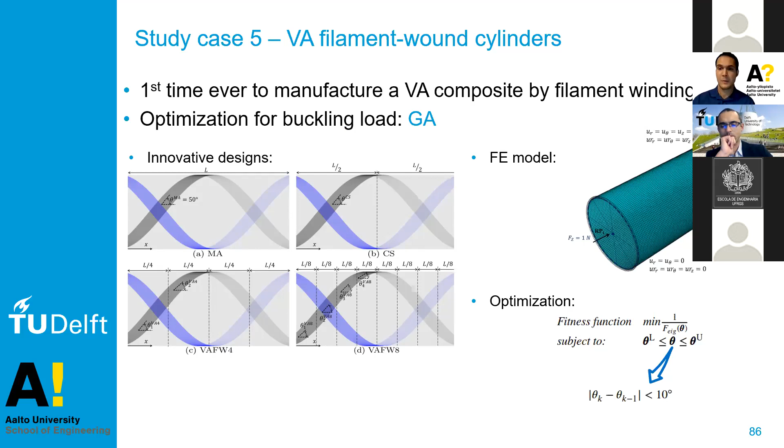The innovative designs were previously mentioned by Saullo, so I don't need to go too much into details here. The fitness function, which is also an objective function, was to maximize the buckling load, the first buckling load of the structure.

But in order to provide a proper answer, we have been recently granted a collaborative project between FAPERGS and FAPESP, which are funding agencies from Rio Grande do Sul and São Paulo. We'll see in the following months whether those optimum layouts will be possible or not to manufacture.

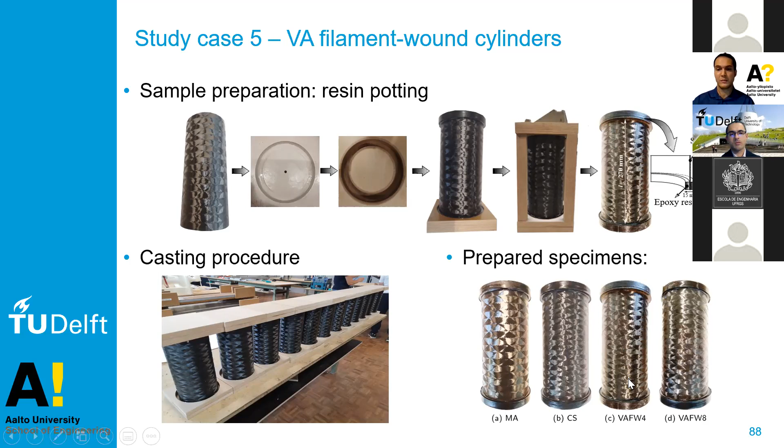On the bottom right hand side, we can see the prepared specimens for the four families considered here, in which on the left side of this figure is the specimen wound with a minimal angle, then with constant stiffness, and then both variable angle tow, where the structure is divided into 4 frames and into 8 frames.

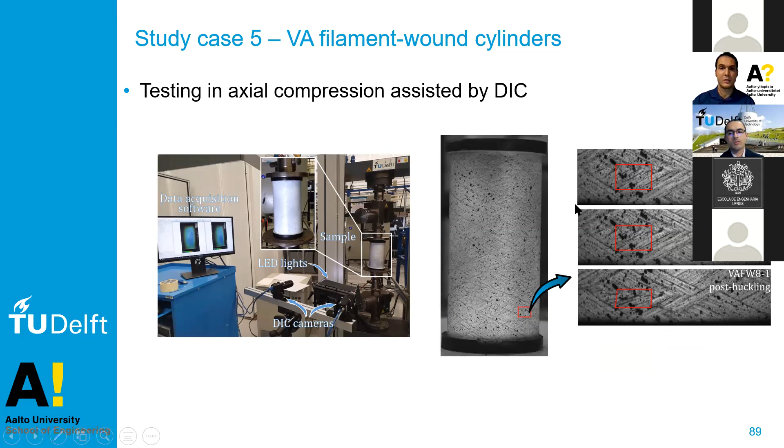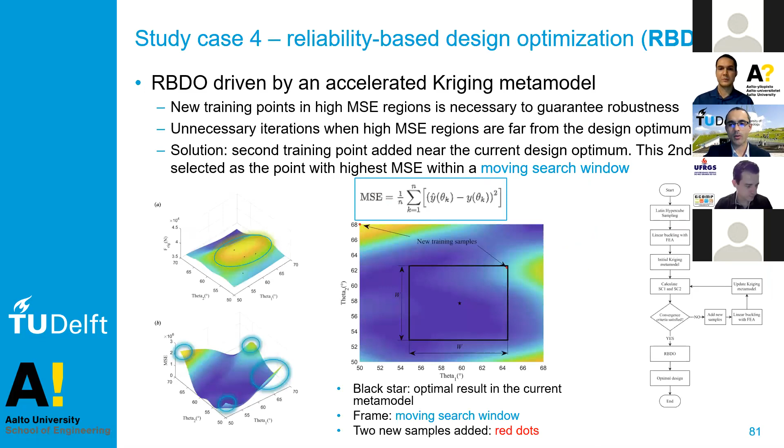The number of control points defines not only the discretization of, let's say, the design space, but it can also discretize the interpolation order. So in this case, we have 3x3 control points, so we will achieve second order interpolation for angles. If you use this interpolation and then you feel that you are never reaching the minimal radius constraint, it's a sign that you can add more control points to have a higher order interpolation, and this higher order interpolation will lead you to smaller interpolation angles.

So the advice is start with less control points. If you reach the minimal steering angle, or if you don't reach the minimal steering angle, then it's a sign that you need more control points that will allow you a higher order interpolation to reach the minimal steering angle. I think it's gonna be helpful for someone who wants to start with this subject.

Thank you. That actually was a question of Mateus Madrid, and he has another question here. Another question is: in wing panels, is the objective of optimization to minimize compliance?

That depends. Minimize compliance means stiffness. That really depends—I think for the right airplane design, we're looking at minimal fuel consumption. So if you consider the airplane as a whole, novel designs are based on what is the minimum fuel consumption for a given airplane mission. So this multidisciplinary optimization might not even lead you to the most lightweight design.

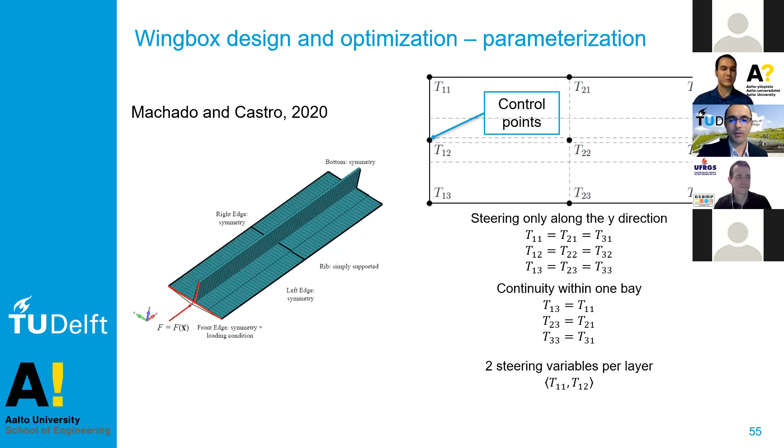Another question: has there been any investigation into the performance of VS panels on impact? That's a very good question—especially not only impact, but compressive behavior after low speed impact, compression after impact. Let me go back to the beginning of the presentation to try to show this quickly. Initially the answer is no.

But if you go to AFP designs, where you have these resin-rich areas—can you see my slide here? With AFP, using cut and restarts, you have these resin-rich areas, and they indicate something will happen there if there's a low-speed impact, with regards to crack initiation. So I would expect the compression after impact behavior to be of lower quality than a straight fiber laminate.

On the other hand, look at the CTS—it does not produce this resin-rich area. So I would expect for AFP with cut and restart, it will be worse, or quite worsened by the fact that you have steered fibers. But for the CTS, I don't know. That would be my answer, but I'm not sure it fully agrees with that.

There's one question here now, I think for Humberto: How is variable stiffness better than the conventional filament winding method, especially for an internally pressurized cylinder, since the loads are not very much? For internally pressurized cylinders, we don't have the answer yet, but for uniaxially compressed ones, we could...

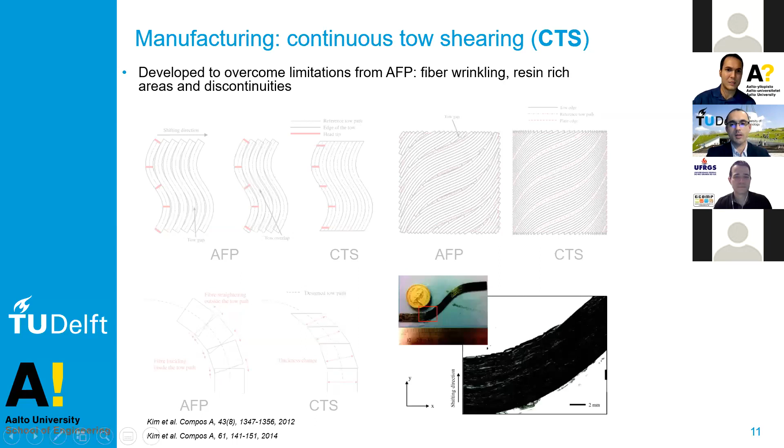Saullo, could we go to one of the last slides with the table? We've got an improvement in terms of ultimate load of 70% for the maximum supported load with the variable stiffness configuration. But for internal pressure strength, we can certainly get improvements, especially because we have more room for improvement there, and the experimental test is also easier to carry out. Unfortunately I can't give you the answer now—maybe in a few months.

Okay, I did all the questions that were previously here, but now I have 4 more. It's okay, let's go—I'm going to do at least 2 more.

The next question: 3D printed continuous composites have been growing significantly in the past year. It seems that 3D printed structures could achieve even stiffer, near-optimum structures. I would say so far, no—for example, I have a 3D printer at my facilities at Aalto from Anisoprint, and I've been struggling for many months to produce high quality laminates, even without holes and discontinuities. We've got a lot of resin pockets and fiber deviation. So my answer is it's not mature yet compared to, for example, TFP and CTS, but I think in the next few years it will become one of the best technologies to produce high quality composites.